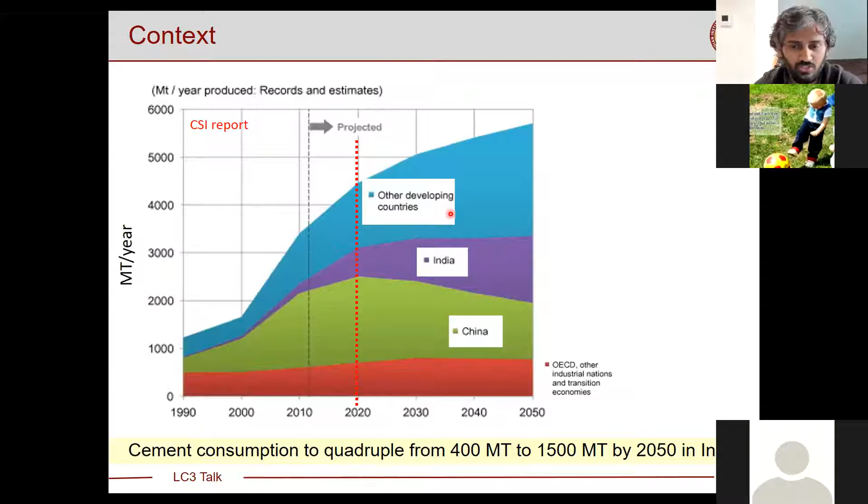So the context is we are currently in 2020. You can see here the global cement consumption, which is plotted for the next 30 years. We expect the consumption of cement to grow nearly fourfold in India, as well as in other developing countries. And we know cement is one of the energy intensive and emission intensive materials. So we need to see how we can alleviate this environmental impact of meeting the demand, as well as the associated emissions of the material, by the use of more sustainable forms of solution. Of course, the sustainable forms of solution come in several different layers. And one of the simplest or most direct forms of solution is making the cement itself more environmentally friendly.

The other layers would be improving concrete designs and making concrete more environmental friendly. A later part would be making the structural systems itself more environmental friendly by optimizing the design itself. But during the course of this presentation, I'll talk only at the level of cement, where how we can make the cement more environmental friendly and without compromising on the properties.

So by the use of this blended cements route, which are mainly by the use of mineral admixtures, we can cope up with increase in this demand because we bring in a lot of other alternate resources that are available into our material flow cycle. By doing so, we increase the amount of material apart from the natural resources that we'll use for cement production into the material flow cycle.

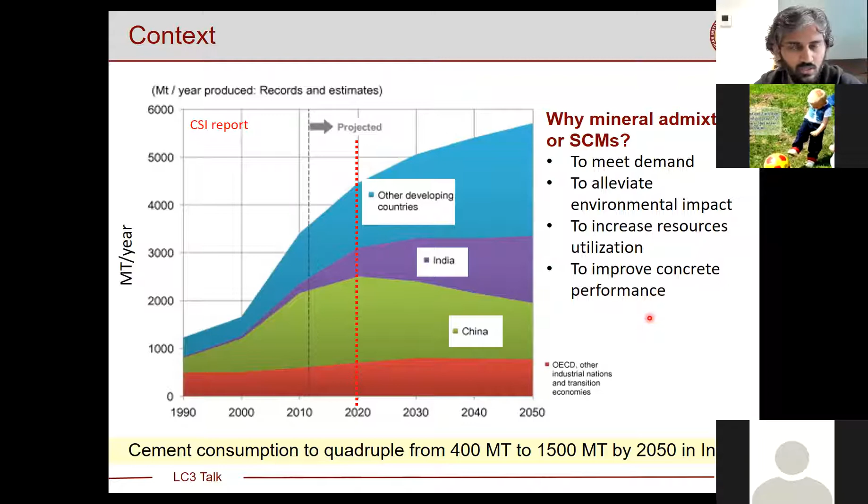We can reduce environmental impact, utilize a lot of other resources that are available in the forms of byproducts, and people don't call waste anymore. We have to use a byproduct or potentially downstream utilizable resources, and how we can look at improved concrete performance, which is also important towards the sustainable solution.

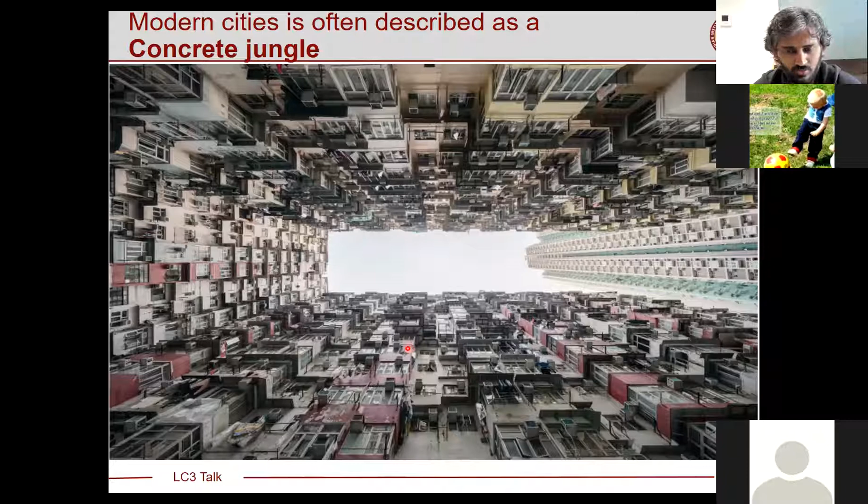And the reason we need to work on new cement and the material as such is modern cities are all often described as concrete jungles. And you can see the amount of concrete that is used in just one picture here. And if we want more facts, let's look at the numbers. This is the growth from the UN Environmental Report. This is the growth in the population over the last 50 years. And this is the growth in the cement consumption and steel.

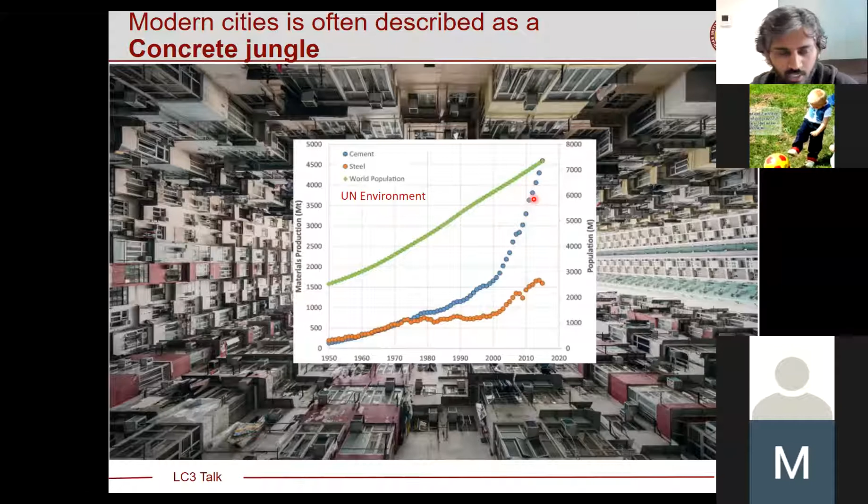And compared to steel, which has only doubled, you can see consumption of cement, especially in the last 3 decades, has nearly grown from 1,000 metric ton to around 4,500 metric ton. So we are looking at a resource which is exponentially growing over the last 3 decades, and it is set to grow for the next few decades as well to meet the demands of housing, infrastructure in a lot of developing economies, right?

So before we go into the LC3 itself, let's look at what are the essential qualities of a cement. Essential qualities of cement, as we know, is you have this plain cement particle which is dispersed in water, and it reacts over time, and it starts filling the spaces with more and more hydration products. And when this happens, it gains strength over a period of time. That's why we need curing.

And when we move from plain cement, just clinker, to blended cements, we replace some of these cement particles with what is known as SCM, cement substitutes. And when we do so, these react at different rates. So for instance, if you take cement, nearly 50% of cement reacts in just the initial few days, and then most of it happens much more slowly over the period of time.

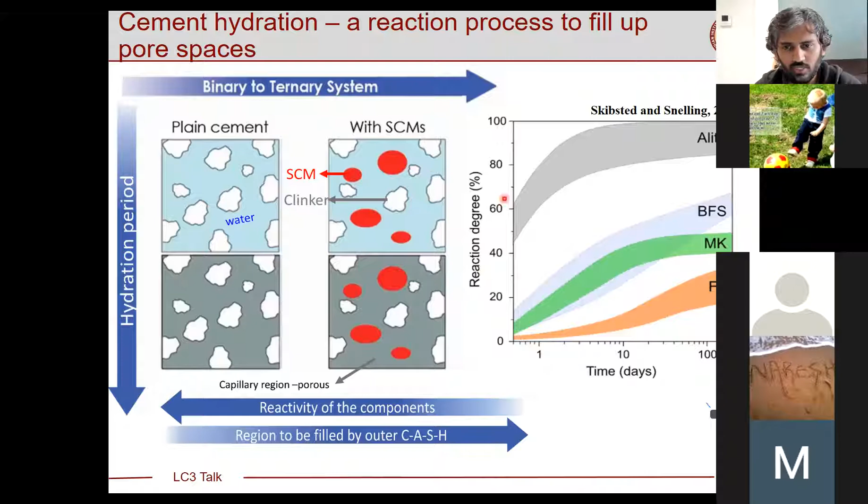There are several different supplementary cementitious material resources like fly ash, metakaolin, and slag, and all of them have varying levels of reactivity, which means fly ash reacts a bit slowly only after 10 days, and slag and metakaolin react at a varying rate compared to other SCMs, right? So all of these resources can be utilized, and you can make more complex cements by having a combination of different resources as such, right?

So what are these materials which can be put into cement and concrete to make it environmental friendly? So just dealing with a touch of chemistry without going into much detail, you have a wide range of materials, but most of it comes within this ternary chart of calcium, silica, and alumina, because these are the elements that are available in the largest quantity on the Earth's crust. And to make a resource like cement, which is used in ample amounts, we need to utilize the elements which are available in large quantities. We cannot go for elements which are available in very minor amounts on the earth crust.

So there are materials which are purely siliceous, like silica fume, rice husk ash, bagasse ash, other vegetable ashes, fines from glass, and aluminosilicates, which have both alumina and silica. So these can be fly ashes, which are from thermal power plants, and calcined clays, bottom ashes, volcanic ashes, and some resources which are rich in calcium as well. So these are some calcium rich fly ashes, slag, and there are other resources which are basically less reactive, but still potentially utilizable in cementitious materials. It could be limestone, marble powder, quartz, and iron-rich slags, right?

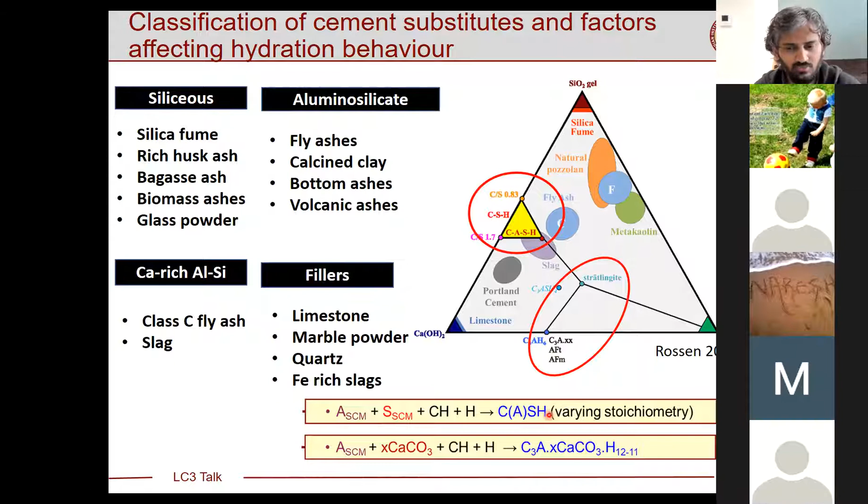So all of these materials react to form basic ingredients, which I'll not talk about in much detail, called CSH, the binding agent in the cements. Right? So there are several factors that we need to understand before even trying to delve into new cementitious materials as such. There are particular characteristics which are intrinsic to the material, like particle sizes. We want cementitious material or any potential cement-based material to have a very narrow range of particle sizes, right?

And they should be reactive in the sense that, in a medium of water or alkaline solution, they should be able to dissolve and facilitate the formation of hydration products. And thereafter, the rate at which the material reacts also becomes important. The next would be how much of this material we can utilize and what are the other factors that control the final formulation of the cement that we know.

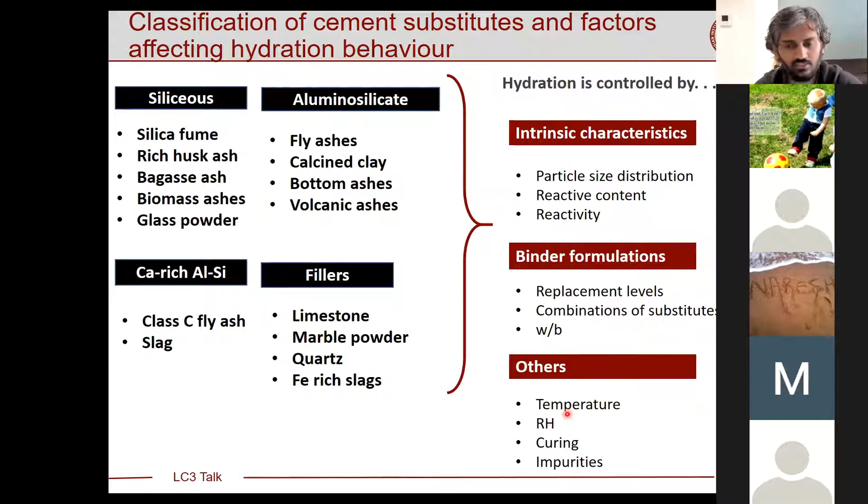And there are a wide range of other factors, whether any new cement or blended cement that is developed, how it behaves at different temperatures, whether it requires the same level of curing as Portland cement, or whether it could sustain a similar level of internal relative humidity, or how it evolves at different relative humidity. So all of these factors become more scientifically important, which I'll just introduce for now and not talk much in detail.

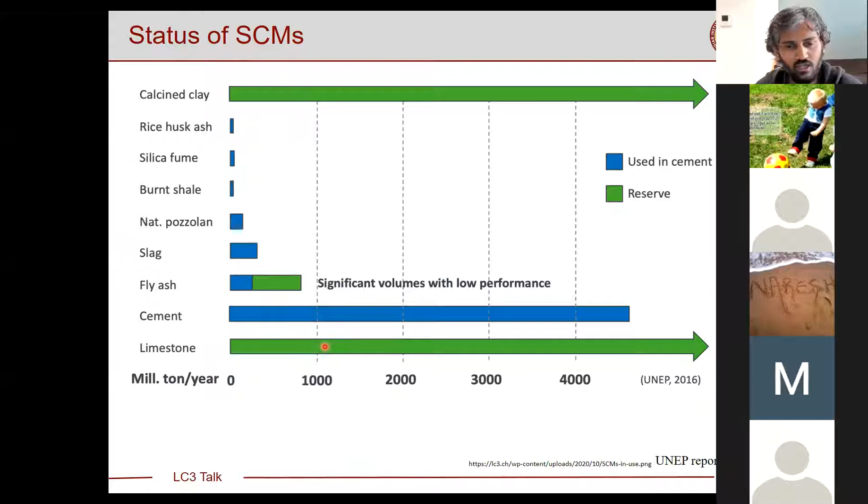And two widely available resources in terms of quantity that can potentially meet these demands are calcined clays and limestones. Again, both of these are natural resources, but I'll talk a bit later about how we have potential alternate forms of these clays and limestone, which are downstream materials and byproducts in other industries which could be used. Right?

So in order to appreciate the new kind of binding material as such, let's look at what happens during cement reaction. So in a typical hydration of Portland cement, we all know cement exerts heat. A major portion of the hydration happens within the first 20 hours itself, and thereafter it's much slower. So this is a heat emission curve.

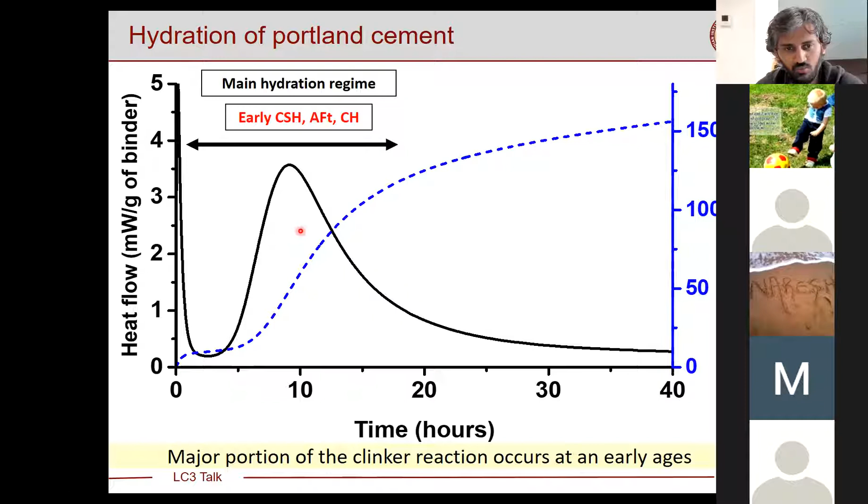And when we try to zoom in and have a look at this reacting cement as such, a major portion of early age reaction happens with formation of these hydration products, and at later ages you have other hydration products. So this is how, when we zoom in, take a slice of hydrating cement, keep it in a microscope, and look at a few micron sizes. So these are cement particles. These are the interstitial spaces where you have water in the beginning, and now you can see a lot of fine hydration products. And with time, this becomes much more compact.

So you can see this is the same cement, but at a later age, about 1 month of curing, you can see in the microstructure it's more compact and dense. That's why on site we say that you need to cure concrete and it gains strength over time, because it develops a much more refined and finer microstructure over time, right?

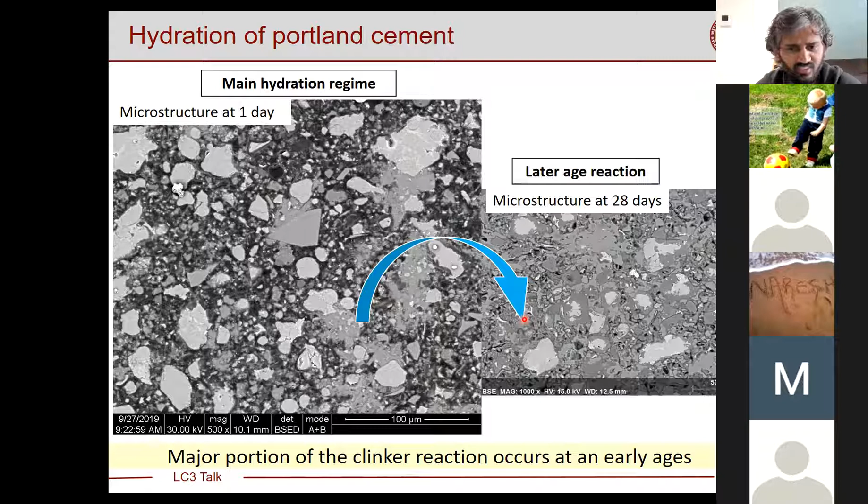So this makes it more interesting, because it could have similar levels of strength and property development like your clinker phases, which people have appreciated over the last 2 centuries, and have adopted and got used to the kind of construction practices that deal with Portland cement and its strength development characteristics. So that's what makes LC3 interesting.

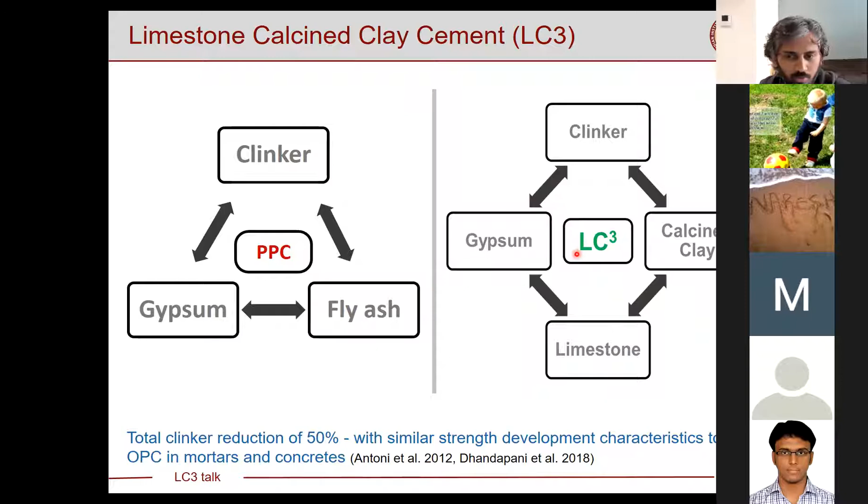So when we talk about LC3, this has the same Portland clinker in a different amount. In addition, it has calcined clay, so it needs specific characteristics of clay and processing of clay. It has limestone in it, and it has gypsum in it. So by having these components, we are able to create a system which is more efficient in terms of space filling and property development. In terms of composition, there is nothing specific about this particular composition, but this is the widely adopted one that we are trying to project to the larger market, especially to the cement manufacturers.

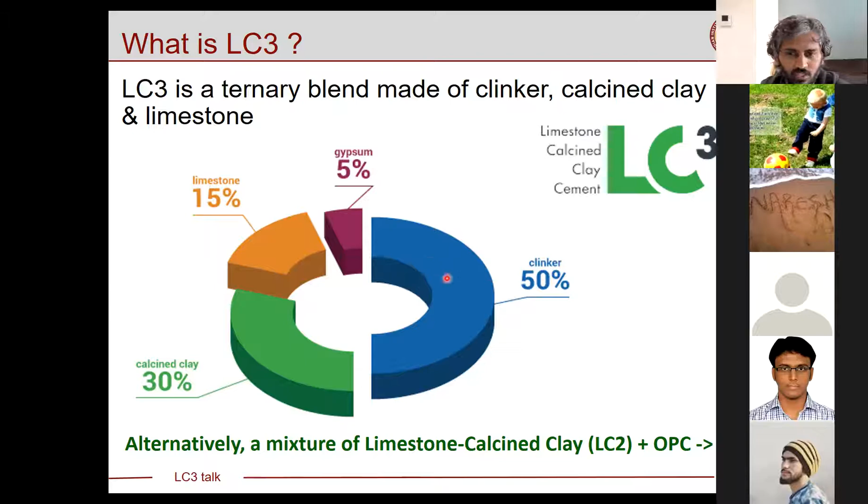So we are looking at Portland clinker in LC3, which is about 50%. You have calcined clay, about 30%. You have limestone, which is about 15%, and finally gypsum, about 5%. So just like your silica fume or metakaolin, which are high performance mineral additives, you can just have a mixture of this calcined clay and limestone, which is called LC2, which can be sold as a mineral admixture, where you can use it in an RMC and produce concretes directly with LC3. So this is the composition of LC3 that we are going to talk about in the later part of the presentation, right?

So what we look at in terms of the LC3 cement is the combination of different reactions. For Portland cement, we are used to this chemistry where initially you have CSH forming, calcium hydroxide forming, and other minor reaction products. When we go for blended cements and add any blending material, calcium hydroxide is consumed and additional pozzolanic CSH is formed. When we have just limestone in it, it brings in slightly additional complexities, where you have this ettringite phase, which are large needle structures formed initially. These tend to remain stable, so this reaction is avoided. Rather, it starts forming other new hydration products based on calcite particles.

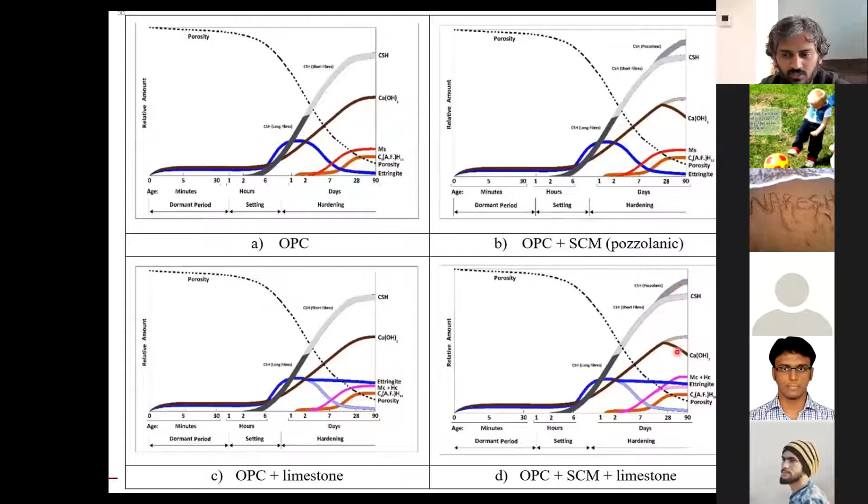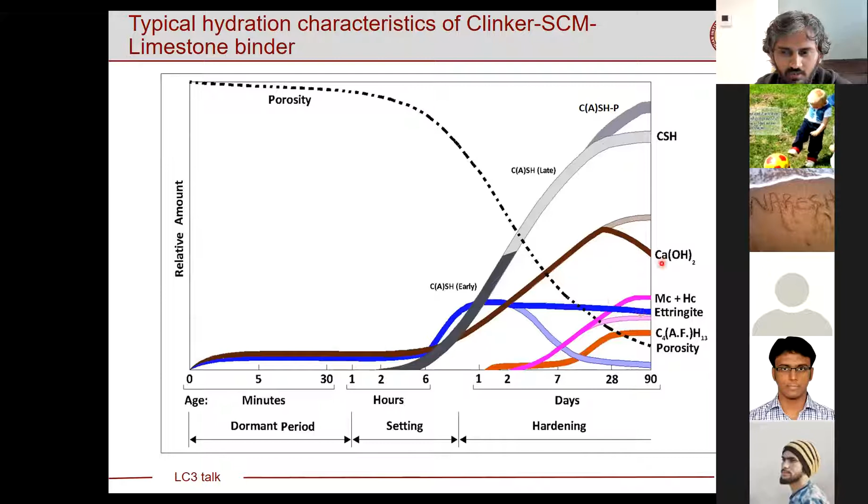So when you have a combination of this pozzolan along with limestone, you have the benefit of ettringite remaining stable and other carboaluminate phases forming, and the potential benefit of any blending pozzolanic material, which is pozzolanic CSH formation from calcium hydroxide. So this is the final chemistry that we are looking at. Again, I'm not going to go into specifics, but you need to understand this as the AFt and AFm phases, which are stable, and formation of pozzolanic CSH from calcium hydroxide.

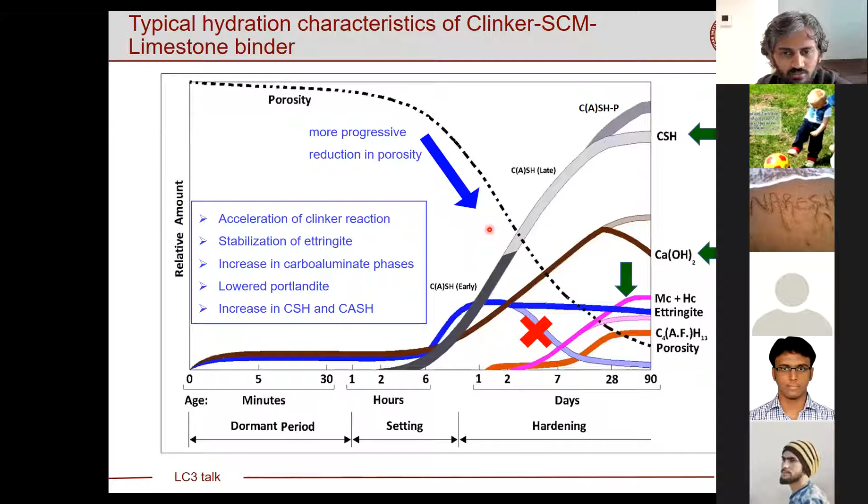Right? So it has a combination of different reactions in terms of its background: the reaction of the clinker phases is accelerated, and the ettringite phases, which are large needle voluminous hydration products, remain stable. So it contributes more efficiently to the space filling process. It forms new hydration products and has the benefits of pozzolanic reaction as usual. So all of this leads to a more progressive reduction in the porosity. That's why the property development, as I showed earlier, was much more enhanced by 7 days, right?

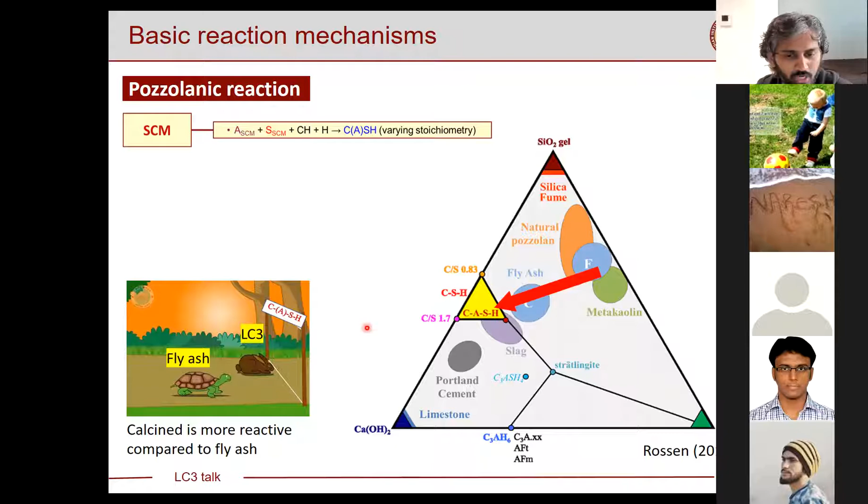So these are the two reaction mechanisms, but how LC3 varies from your fly ashes is because of the reactivity. The metakaolin or the calcined clay phases react much faster. It's like a rabbit in terms of forming your basic binding ingredient CSH compared to fly ash, because it has high reactivity and forms your pozzolanic CSH quite rapidly. It contributes to development of properties quite rapidly as well, right?

And so we just looked at what are the different blending materials, how calcined clay contributes to reaction, and how limestone also comes in as an additional component. How do we see it holistically as a final product, right? So this is a schematic which is available from the LC3 Technical Resource Center.

So if we take a look at typical Portland cement clinker, you just have the manufacture of these clinker phases, where you need to heat to about 1450 degrees Celsius. Finally, the produced clinker will be mixed with ground gypsum and brought in as a Portland clinker cement.

So when you are looking at LC3, you need clay, which means you have an additional unit which can calcine the clay. What is calcination of clay? I'll talk in detail at later stages. But this calcination happens at a significantly lower temperature, just at around 800 degrees Celsius.

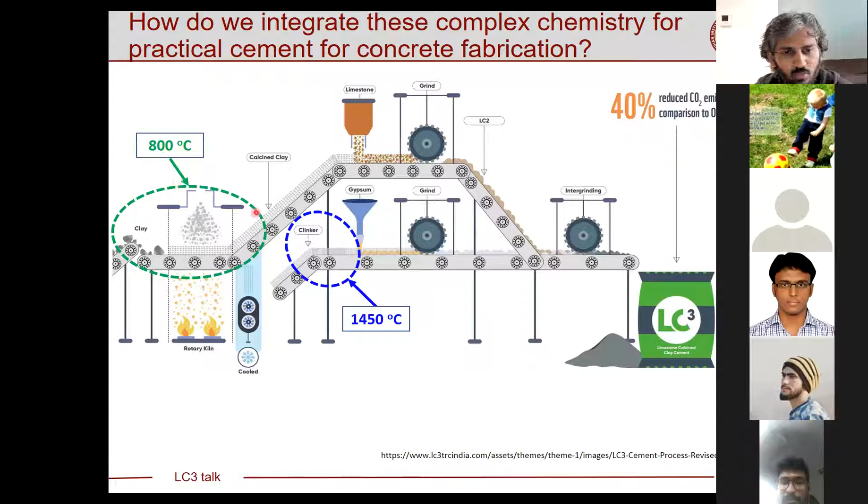And once this is calcined, you take the calcined clay and mix it with ground limestone. Again, when we say limestone, it's not similar to how limestone is used in clinker production. Rather, it's just limestone which is brought in, ground to cement sizes and mixed. So when you mix this calcined clay with limestone, you produce what is known as LC2. And when you integrate this with your Portland clinker phases, you get a bag of LC3. So this is your LC3 cement production as such.

So when we look at this, because you are looking at a heating process which is at a significantly lower temperature compared to clinker, and you are mixing other ingredients which do not require any heat treatment, you are able to use less of your clinker, which contributes to emissions as well as requires intensive processing. The LC3 cement which is produced as such can ultimately have a 30 to 40% reduction in emissions, right?

So let's look at the individual components that go into the production of LC3. So first, clay, which is one of the most important components out of the four. So clays, as we all know, are minerals. These can be classified as 1:1 clays or 2:1 clays, depending on the structure. So for instance, your kaolinite clays are 1:1 clays. Other forms, 2:1 clays, are montmorillonite, illite, vermiculite, etc.

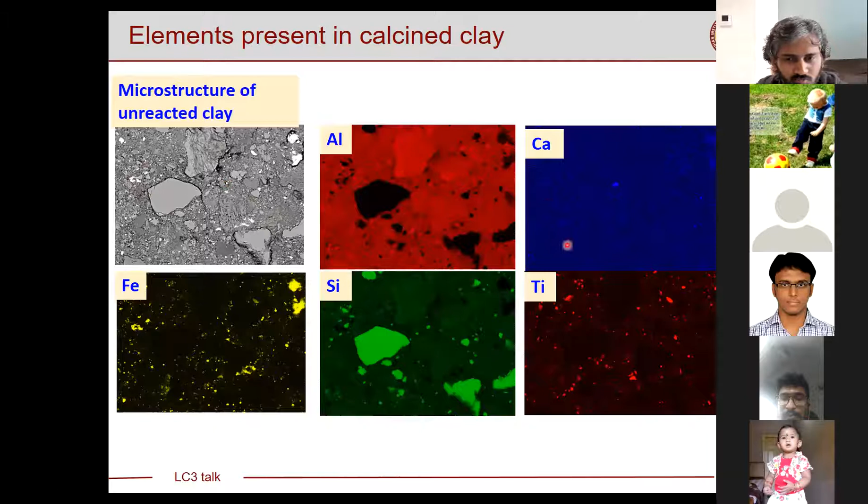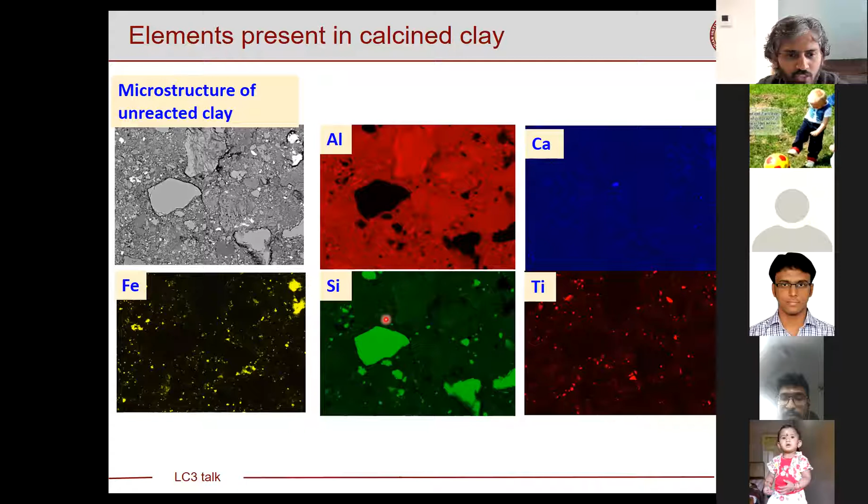When we try to analyze in detail what these elements are, you can have traces of iron, these large particles which are green as silica, which means these are quartz, not reactive. And a lot of these fine particles have a mixture of alumina and silica, so all of them are reactive as such, right? So heat treated clay is mainly composed of alumina and silica, which are the major components which have a tendency to react in your cementitious material. So moving ahead,

as I said, there are several different forms of clay. You have kaolinite, illite, and montmorillonite, and these have been studied. For example, these are strength development of kaolinite, illite, and montmorillonite clay. As you can visually see from the strengths, kaolinite clays are more reactive and contribute to strength development similar to your plain Portland cement. The information is available in this document for reading.

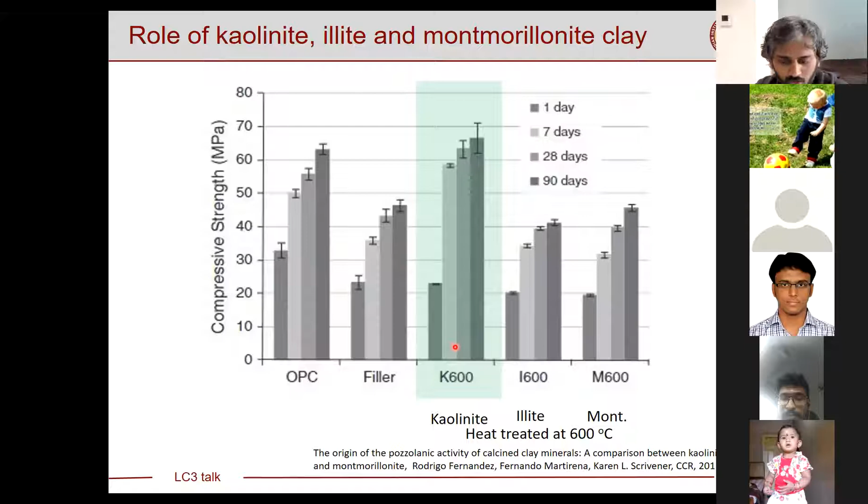So what we can clearly see is, amongst the clays, kaolinite clays have a greater tendency to react because of the nature of their structure, right? So are all clays required? What sort of kaolinite clays should we be looking for?

So in the LC3 project, we looked at several different kaolinite clays. These are purity of the clays versus mortar strength at different ages. The black bar you see is the plain Portland cement strength. At around 40% clay content, you are able to produce strengths similar to your plain Portland cements, which means anything more than 40%, you're not actually getting much benefit at later ages, except for some increase in strength up to 7 days.

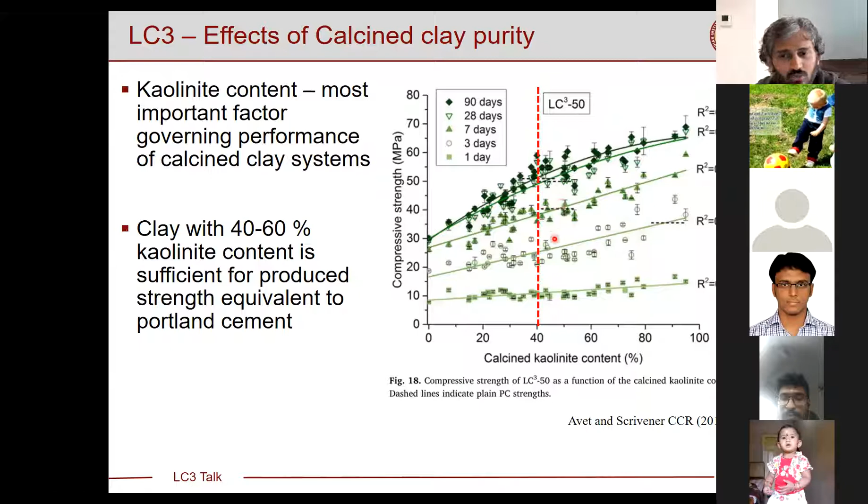So what it tells us is, in order to produce a product with strength development similar to your plain Portland cement or OPC, which people are used to, it is okay to use clay which has only 40% purity. Which means anything above 40% can be intermixed, or another potential benefit is you can start using these impure clays which are not well utilized in a lot of other industries.

So let's come to the limestone part of it. Limestone, as we all know, is calcium carbonate. It's available in only 4% of the earth's crust. It's available in several different natural forms like chalk, limestone, marble, which are produced by sedimentation of shells over several millions of years. There are also other sources like marble dust, dolomite, slaking waste, paper sludge, and marl, which is a mixture of clay with limestone. So all of these are potential limestone sources.

And there is also a possibility to produce limestone or calcite based minerals by this increasingly adopted process called carbon sequestration. One of the major ways of capturing and storing carbon is to capture it in a calcium or magnesium source as calcium carbonate and magnesium carbonate, which means these minerals could be made available for use as a cement blending material.

And as most of you might already know, limestone is already utilized in cement production. So what is new? That might be the question occurring in your mind. When we use limestone for cement production, we break down this calcium carbonate and release CO2. Instead, when we directly use this calcium carbonate in cement, we don't release that CO2 into the system. Of course, it has other benefits, which I'll talk about.

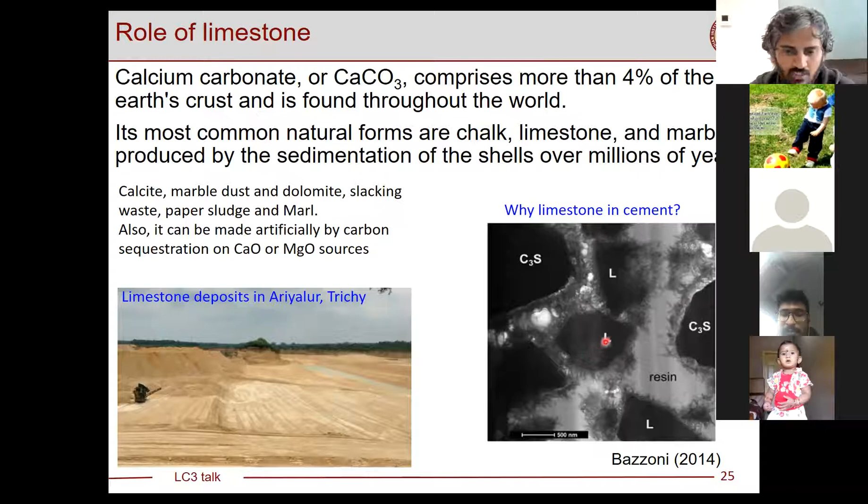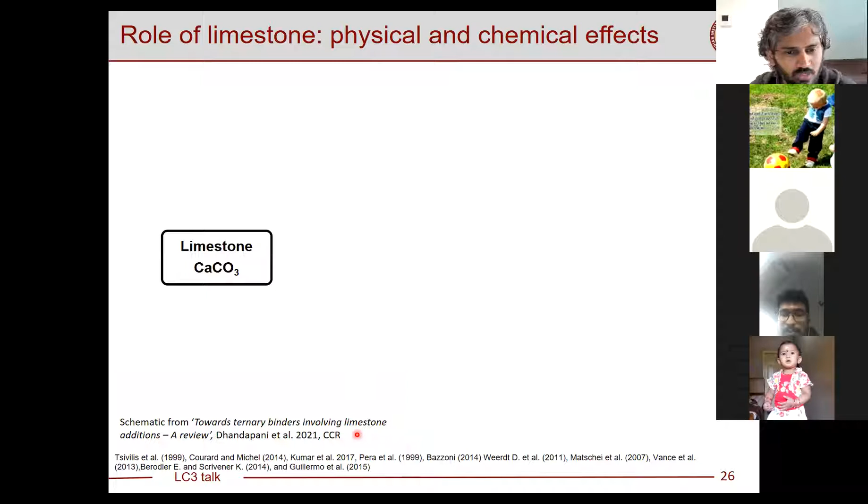Again, this is not the only reason. There is a detailed classification which we have worked out and put out in this review document which can be accessed publicly. So limestone has physical and chemical effects. In terms of physical, we call it dilution because it's less reactive. Because these are fine particles, it could have a shearing action on your other phases, and the fine particles could also reduce capillary space and increase the space filling process.

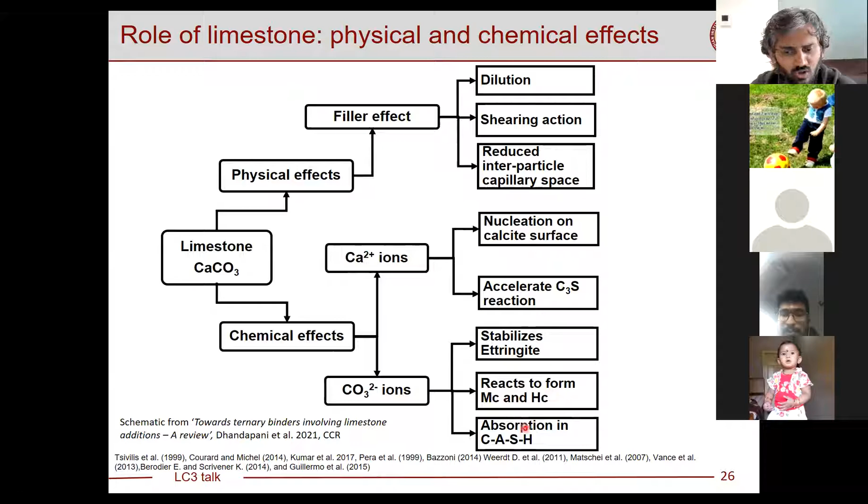And calcium-rich surfaces, as I showed previously, can lead to nucleation of CSH. It also accelerates the reaction of your C3S because it dissolves and supplies a limited amount of calcium into your pore solution at early ages. And the carbonate tends to stabilize the ettringite and react to form other carboaluminate phases. And there is also a chance of these carbonate phases being absorbed into your CSH, right? So these are the range of different reactions.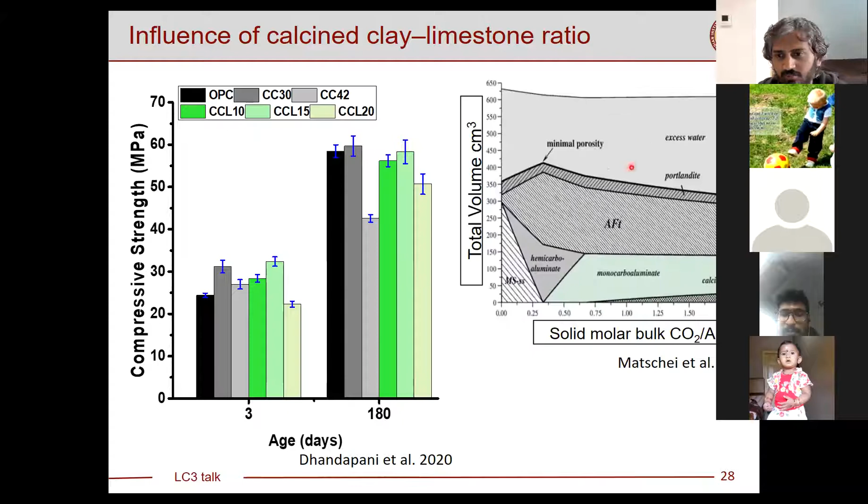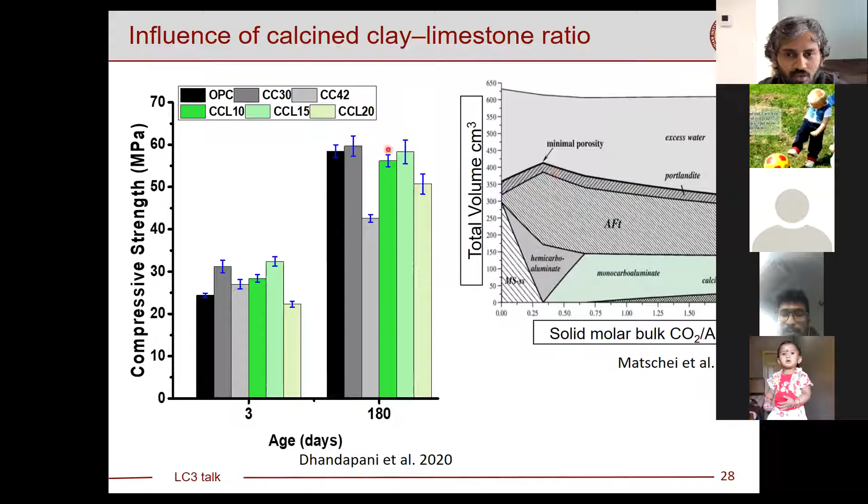So what is the background of this? It is because you have a tendency to have a theoretically lower volume of porosity. Again, these are theories that have been put out; on a civil engineering scale, like the discussion we have in this forum, these are not much important, but what I wanted to emphasize is there is sound background on why this happens and why we get such behavior of strength development in these systems.

So just to talk more in terms of engineering scale, for concrete constructions, the primary need is whether we will be able to produce a range of different concrete types, like low strength concrete, like M30 grade concrete, or a high strength concrete which can be used for an infrastructure project, M50 grade concrete. So we can produce all of these concretes with LC3. Again, you can see the strength development. There is not much difference compared to your plain Portland cement.

Whereas if you produce a similar ultimate strength with your fly ash concrete, the development of strength over time is going to be slower. Of course, there is no harm in using fly ash concrete. It's also beneficial for the environment, but you need to cure it for a longer period to attain similar potential. And when you go for higher grade concrete, you can also see OPC and LC3 have similar strength development, and your fly ash concretes catch up by 2 weeks and thereafter continue to have similar strengths, right?

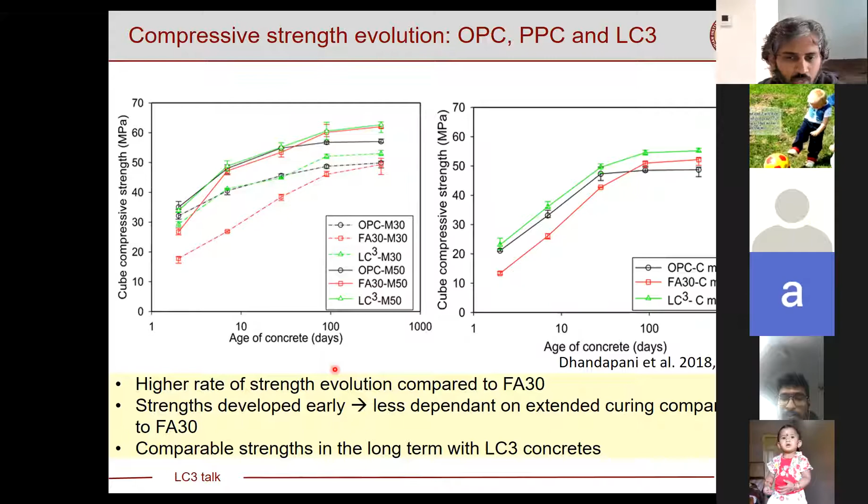So comparable strengths with your plain Portland cement, a major takeaway when LC3 gets standardized and gets available in the market as such. So when does this reaction happen? In order to identify that, what we did was try to look at strength development at different water binder ratios. So this is for your fly ash cement, and this is for your calcined clay limestone combination.

So you can see for fly ash, there is a significant jump in strength between 7 to 28 days. That's why we say when you adopt a blended cement like fly ash concrete, cure it for a longer time. So once you cure it, you get potentially good strength development by 1 month.

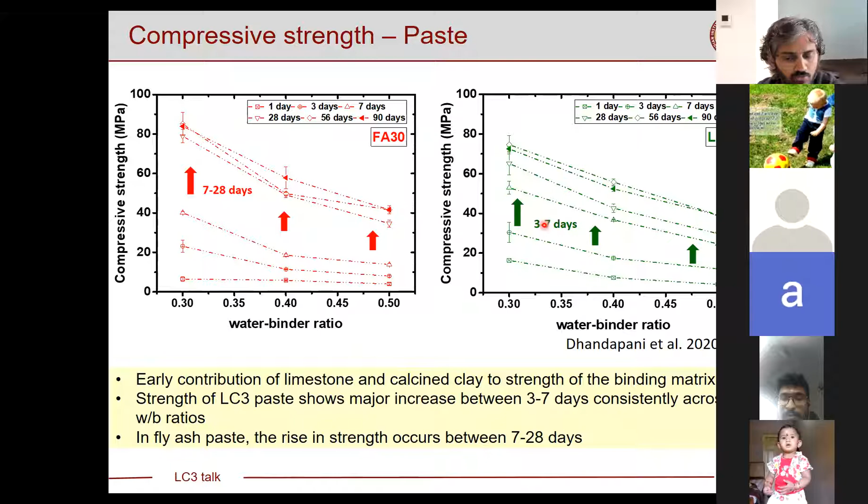In terms of clay, as I showed in the degree of reaction before, it starts reacting very early, right from 3 days. So you can see this major jump in strength across a range of water binder ratios happening between 3 to 7 days. Thereafter, it continues very slowly. So because you have this significant jump in strength between 3 to 7 days, most of your construction activities can continue with similar curing regimes or cycles, depending on the strength requirement on site, right?

Coming to the durability performance. Blended cements are already quite well known for their durability. So we did some tests where we immerse concrete in chloride solutions. Most of you might be aware when chloride goes inside your concrete system and reaches the surface of steel, it will start leading to corrosion of your reinforcement. So resistance of your concrete to ingress of chloride becomes one of the key parameters for infrastructure projects where concrete is adopted on a large scale near the shorelines, right? These are highly sensitive to corrosion and corrosion-based deterioration.

So when we look at LC3, fly ash or OPC systems, these are profiles of chloride, which means how much chloride is present at each depth after immersion of your concrete sample in a chloride solution. You can see the depth of chloride penetration is only 5 millimeters in LC3. At the same or equivalent time in your OPC, the chlorides could penetrate as much as 20 millimeters. As most of you might be aware, a typical concrete cover is expected to be about 50 to 70 millimeters. So the benefit we get is it takes a longer time for chloride to pass through your LC3 systems because it has a very dense and compact microstructure.

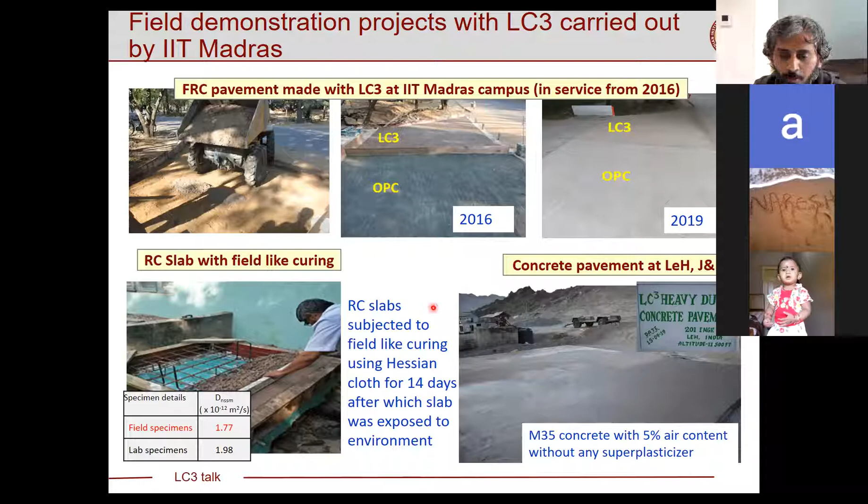And we also made a pavement at Leh Ladakh. This is one of the army camps with LC3, where it will be monitored for freeze-thaw performance over the year. So we have tried to use this concrete in several large-scale projects, and it is expected to be standardized in the next few years. We have submitted a draft standard to BIS, and as and when it comes out, I presume it will be in a state to be adopted by the construction industry quite well.

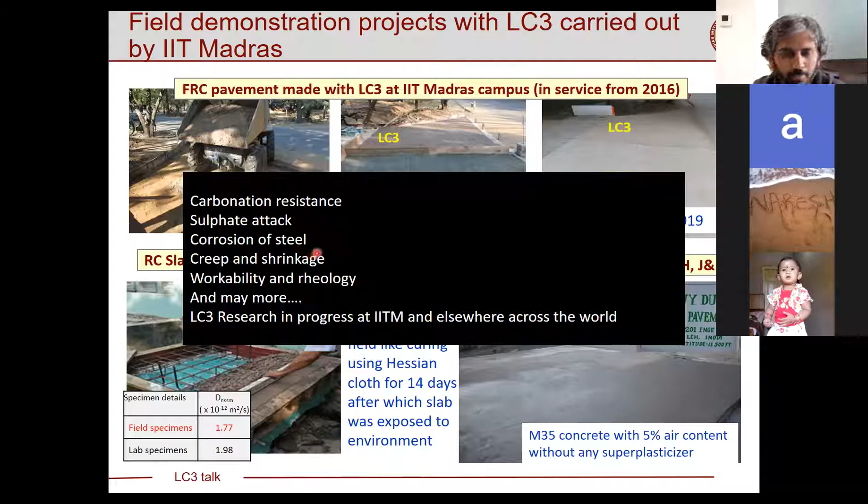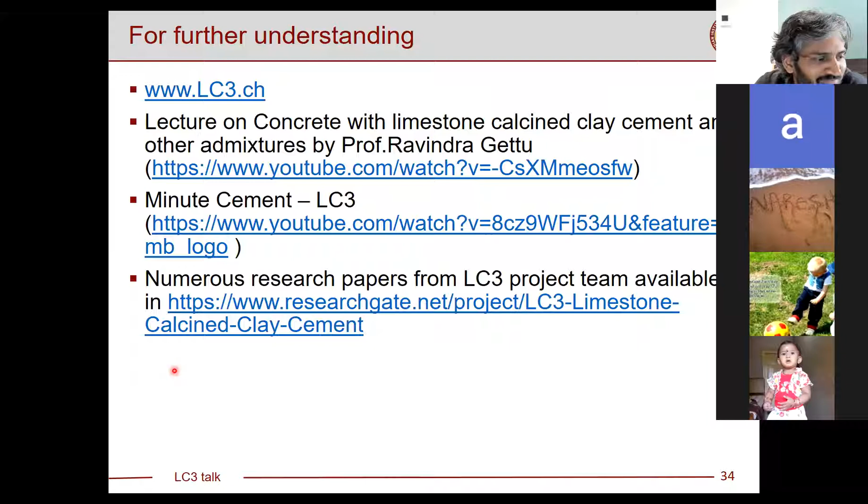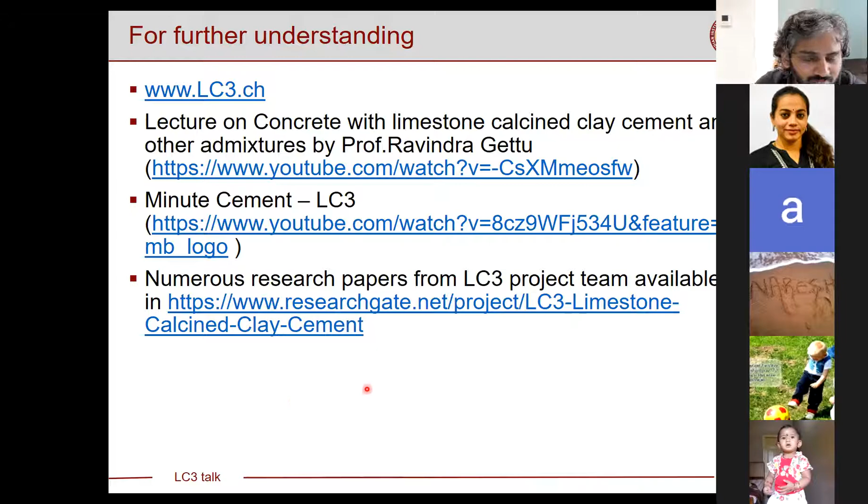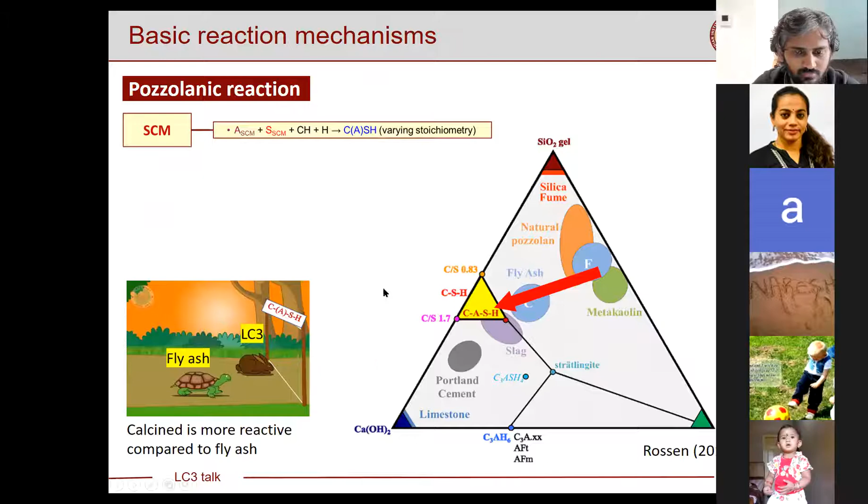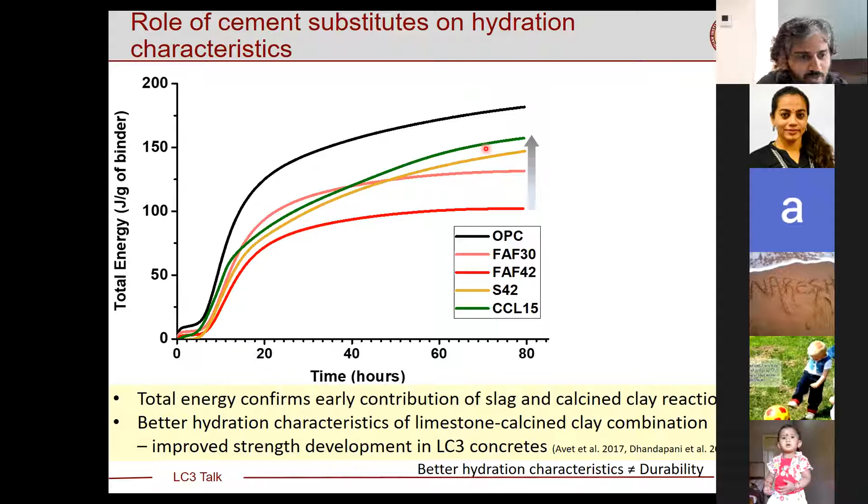But what happens is, unlike your other cementitious phases or ingredients which could react, for instance slag, metakaolin, and fly ash, limestone has a very small tendency to react. So even if you put 30% of limestone in your systems, not more than 4 to 5 percent of your limestone could potentially react. Again, it has to do with how it interacts with other components in your cement material. It needs more alumina to react. And the other reason is the solubility of limestone is also very low. So at a very small concentration in your pore solution, it gets saturated and it cannot dissolve more.

So that's why you can add excess limestone, but it will not contribute to formation of hydration products like your fly ash or slag or metakaolin. So you say we cannot expect more strength by adding only limestone. So SCMs are required. Yes, SCMs are required, and that's why there is a shift towards having a combination of limestone along with a pozzolan. Limestone is also an SCM. SCM classifies everything that can be used to substitute cement. So limestone is also an SCM, but the nature of limestone is such that you cannot get much benefit by using it at a higher replacement level.

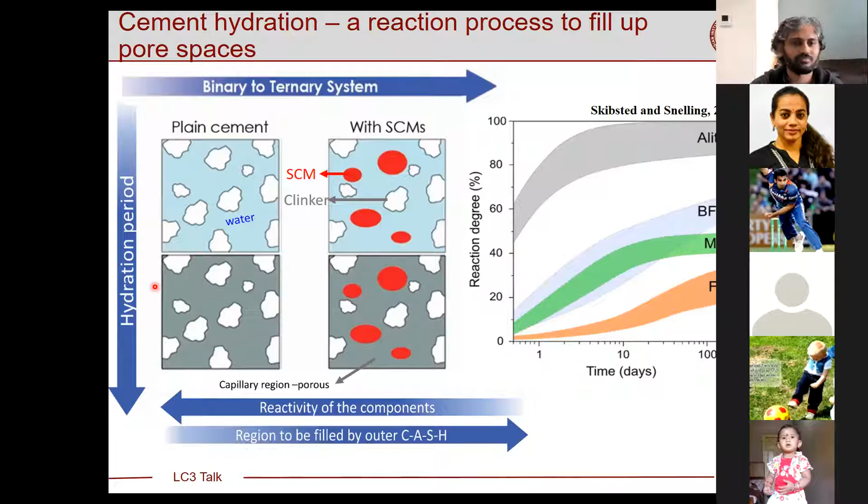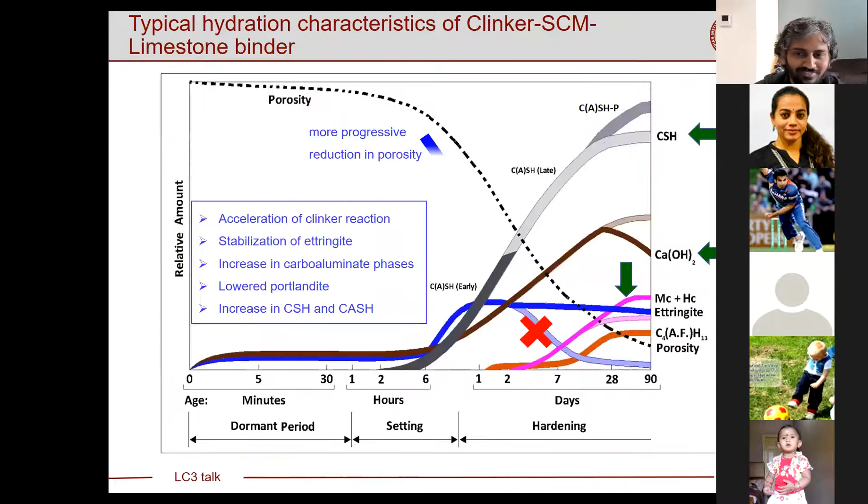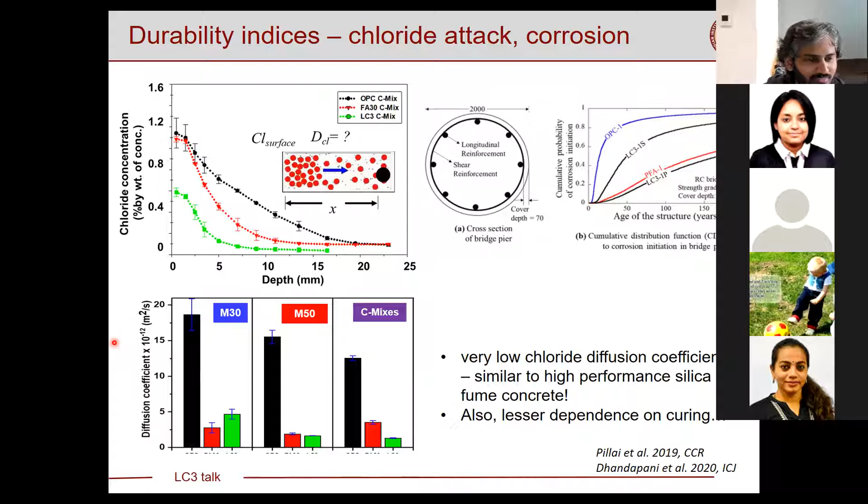So I have a query on the commercialization part. See, like any government or private projects we deal with, the first question that comes while we try to execute something at site is, what is the cost of, say, per meter cube of concrete? So could you throw some light on how much this LC3 will cost in comparison with OPC, say, per 50 kg bag or something?

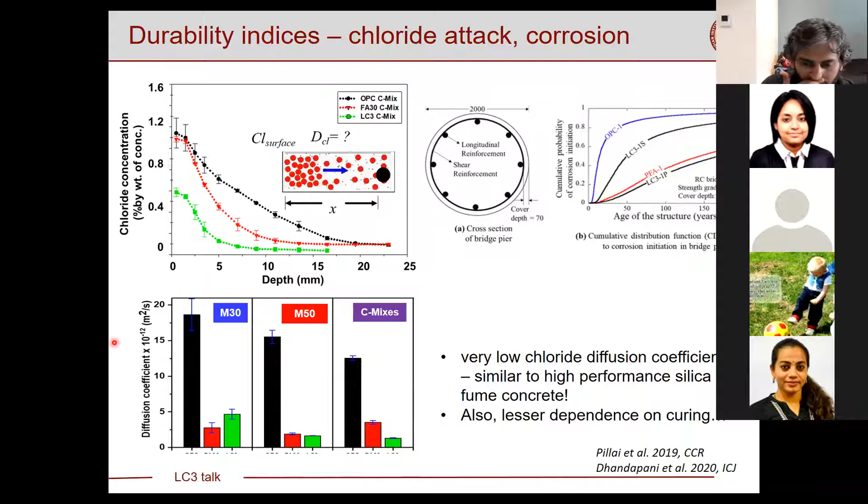Yeah. So in terms of cost, again, it depends on the scale at which it's produced and gets adopted. But in a very simple form, one can naturally think from the process that I showed earlier. Cost involves several different aspects, right? One would be processing cost and the material cost. Because you can process clay at a lower temperature, the processing cost here is cut down. Because you can process limestone without any heat treatment, just grinding, again, processing cost is significantly cut down, right?

So when we are having two replacements for Portland clinker, where processing is at a lower temperature or no processing at all, we expect companies to reduce cost. But that would depend upon the amount of LC3 that could be produced. You need two additional units which cement companies have to put up. One is a calcination unit, the other one is a grinding unit for limestone. Though these may not add up to significant initial cost, there would still be some difference.

In terms of cost, clinker currently costs about 8 rupees per kg. But if you take limestone, a ton of limestone is not more than a few hundred rupees, right? So we are looking at comparatively much cheaper materials being used to replace clinker, and cost has to be low, but industry would have to decide on the cost. How industry operates is, if they find greater acceptance of LC3 in the market, they will market it as a high performance cement. Cost might be more; it's purely commercialization and how industry embraces the technology and presents it to market.

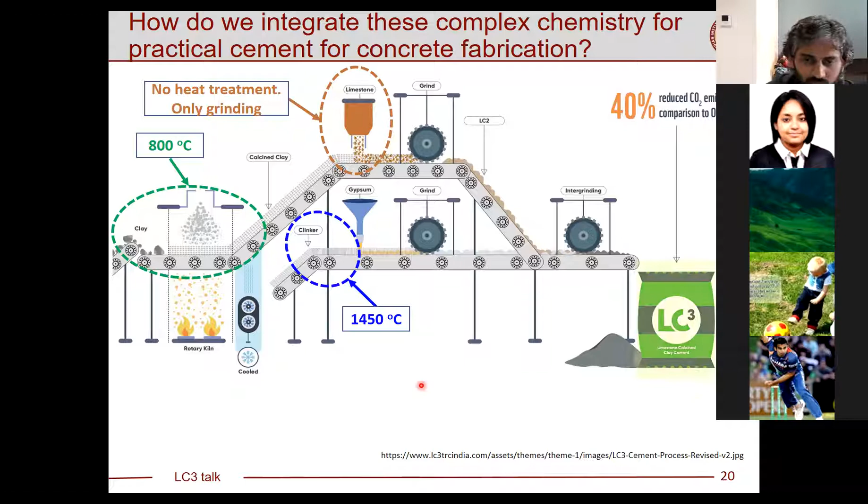Yuvraj, I have one more question. So this demonstration building that we have at the TARAgram workshop, LC3 is used in what way? Is it used in the form of blocks, or is it used for the structure? Yeah, so this building is entirely made with LC3. The blocks were prepared with LC3 cement, right? And you have RC members also, which were prepared with LC3 cement. There were a few comparative columns that were prepared with OPC, I suppose.

But the IIT Madras team even visited this structure a few years ago and did NDT testing to look at the quality. Yeah. So all the concrete that you see here... of course, I'm not sure. We also make tiles with LC3 from the TARA side, but I'm not sure about those. But definitely the bricks and the RC members were made with LC3.

Okay, so is there any comparative deterioration with OPC that is noted over these years? Yeah, I think that's not something to be talked about, because it was a study done as a part of the project, but we just tested for NDT qualities and saw whether it was okay or not. One good thing is people are using the building for all these years, so it's still stable. Yes, true. I visited there last month, so it looked and worked fine.